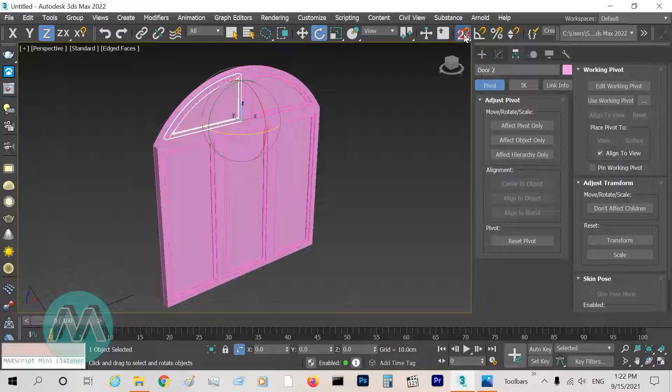In this case, we want to model an arc window. Okay, we have a picture here and we have some parts. In this part we have an arc shape, height 50 centimeters, and its width equals 180 centimeters. And the second part, we have a rectangular shape here and three parts here, with height 150 centimeters and width 180 centimeters.

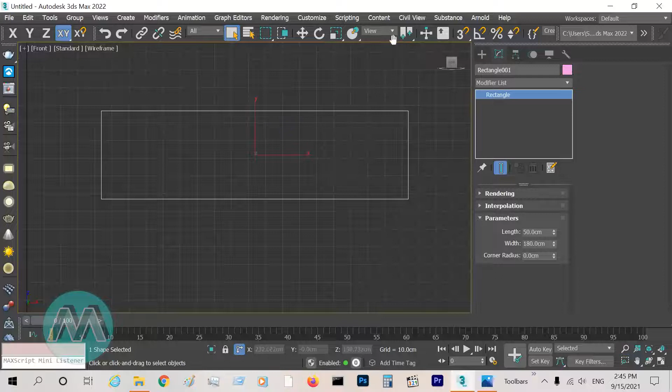Okay, go to 3D Studio Max and front view, draw a rectangle, and set its dimensions: length 180, sorry, 50, and width 180. Okay, I choose snap and set it to vertex and midpoint.

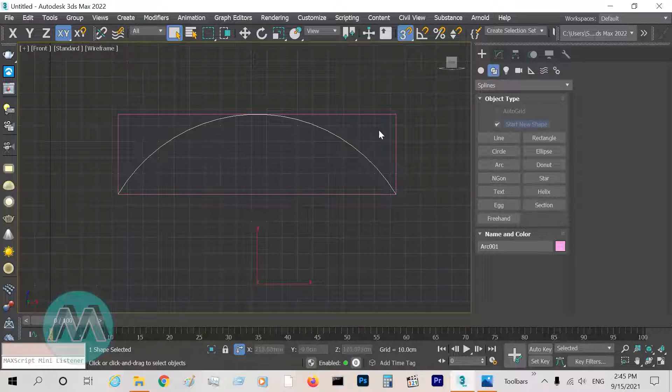Okay, drawing an arc here and here and here. Okay, using this rectangular shape we can draw an arc here. We don't need the rectangular shape, I select it and delete. Select the arc shape, convert it to editable spline, and connect its vertices together. Like this. Okay.

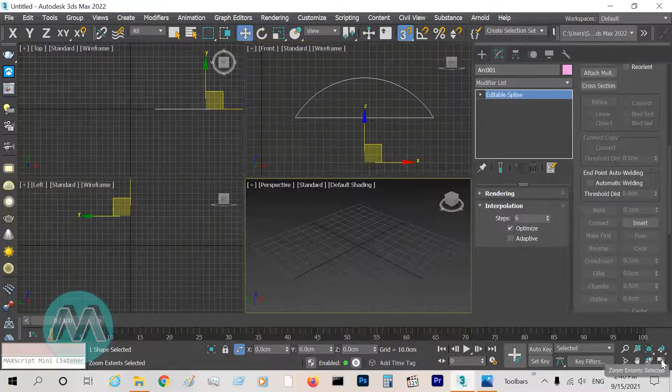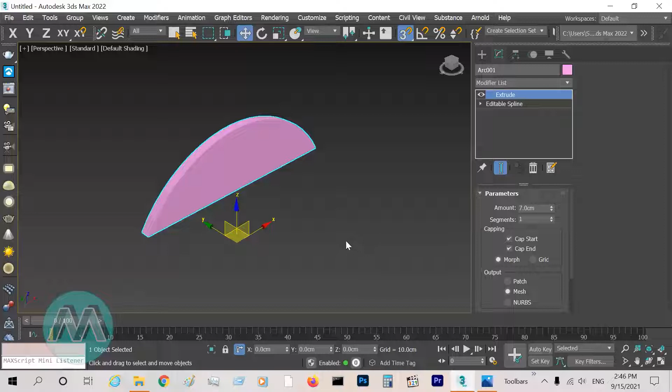We can draw this arc shape in 3D Studio Max, and our thickness is 7 centimeters. For this one, I extrude this shape equal to 7 centimeters and turn off the selection brackets. Press F4 to see the lines of this object and its segments, and I want to increase the steps here for more details in the top of the object.

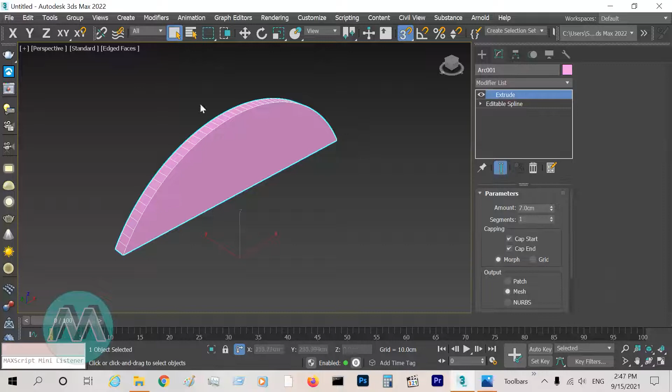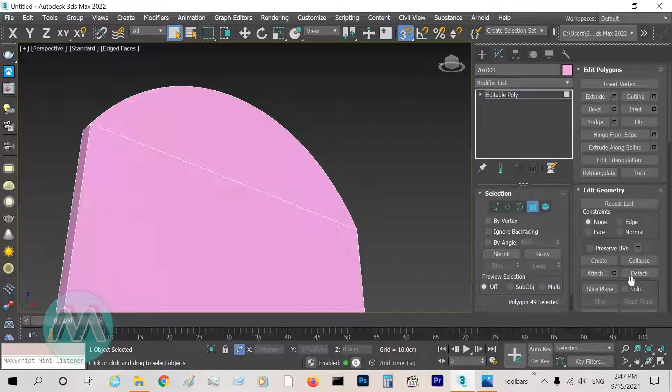Okay, I convert it to editable poly. Select the polygon sub-object mode. Select this polygon and extrude it 150 centimeters for modeling the second part of the window, the rectangular shape of the window. Here we have 150 centimeters. Okay.

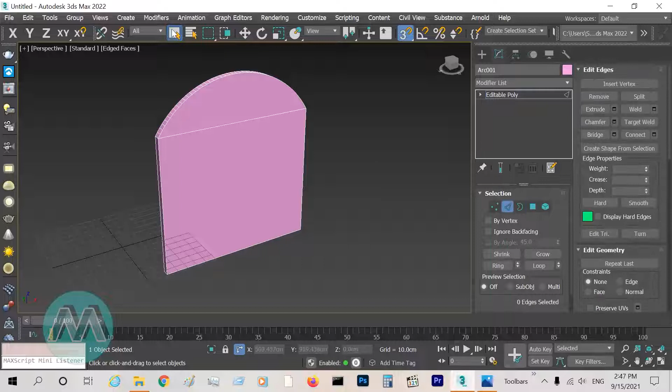For these three parts I go to edge mode, select all edges here. I press F3 to see it in wireframe mode. Select these lines and connect them to each other. We set the segments to 2 and okay. Okay, we have this shape.

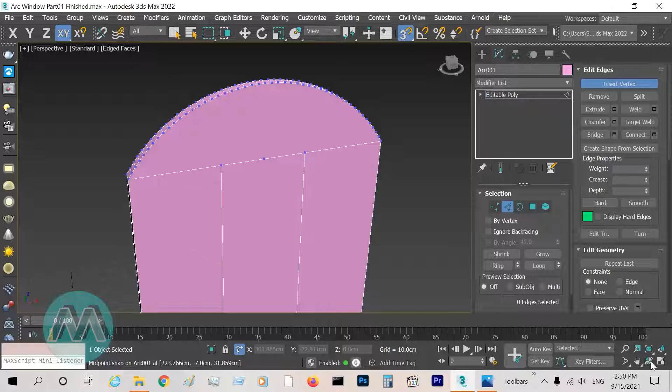I go to the perspective viewport, go to polygon mode, and I want to split this peak into two parts. For this reason, I set the snaps to vertex and midpoint, go to edge mode, and insert vertex here, one, and here. By using the snap, we can put the new vertex in the middle of these lines, here and here. Okay, I go to vertex mode, select this vertex here and this vertex, and connect them with the connect button.

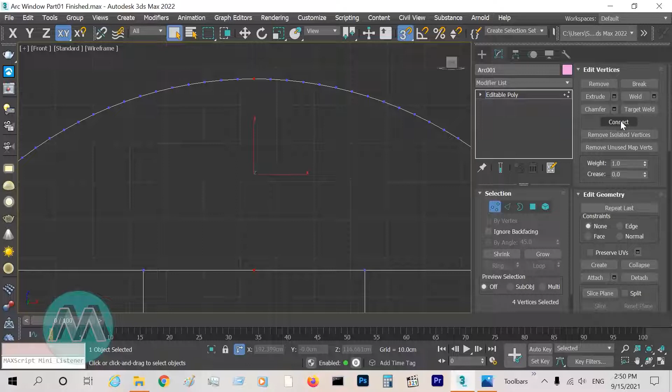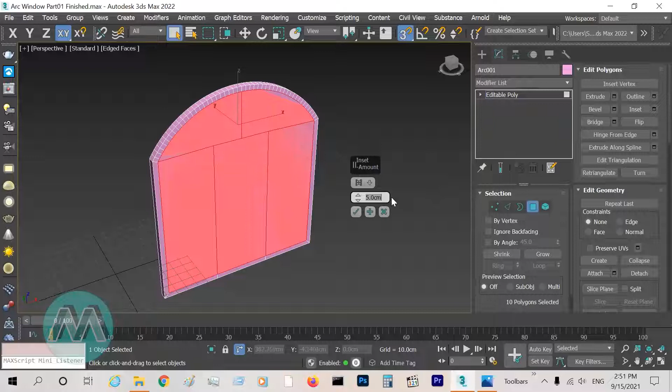Okay, I go to polygon mode, select all the polygons in front of the window and in the back of the window, so we have 10 polygons here. Okay, in the picture we have 5 centimeters in this thickness. For this reason, I go to inset and set the inset to 5 centimeters, and set this option to by polygon, because we want to split the polygons here.

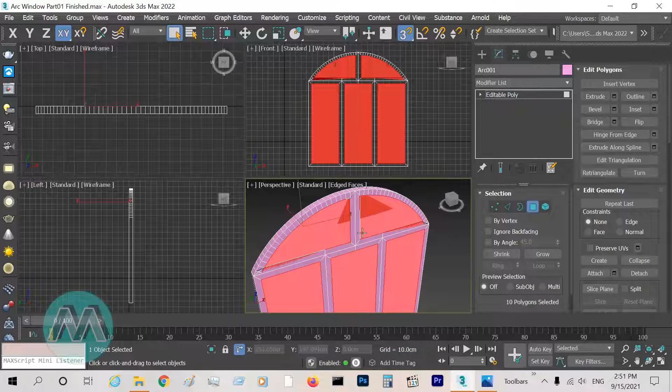Okay, we have some problems. You see we have a dark area here and here, and it's because of vertices crossing into other areas. To solve it, I go to the front viewport, and I want to move this vertex. Okay, turn off the snap, and I move this vertex here and here.

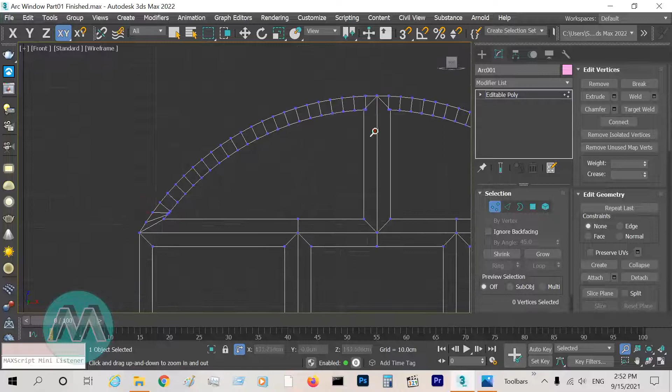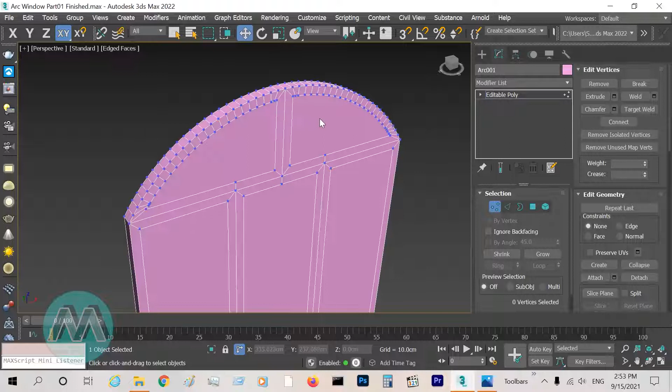Notice that we move the vertex in a way that we save this curvature shape. Okay, I go here and fix it. Also here, and here. I first move this vertex and this and this. Okay, we have a nice result. If I go to the perspective window, we can see we solved this problem.

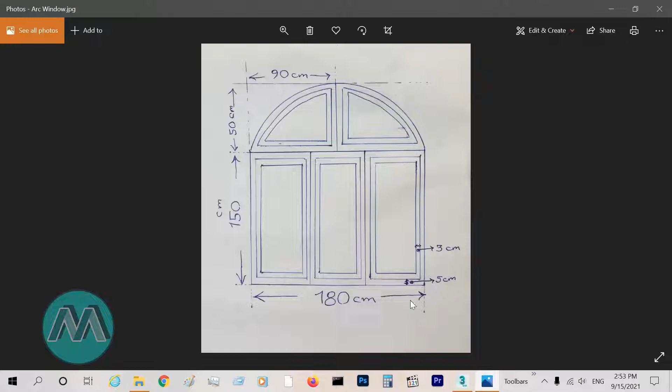Okay, I select the polygons that are automatically selected and extrude them about 1.5, negative 1.5, and we have 3 centimeters here for the second part of the window. For this design, I select the polygons and inset them about 3 centimeters. We have the same problem here, and I want to solve it.

Go to vertex mode and move this vertex to solve this problem, like it. Okay, I go here and here.

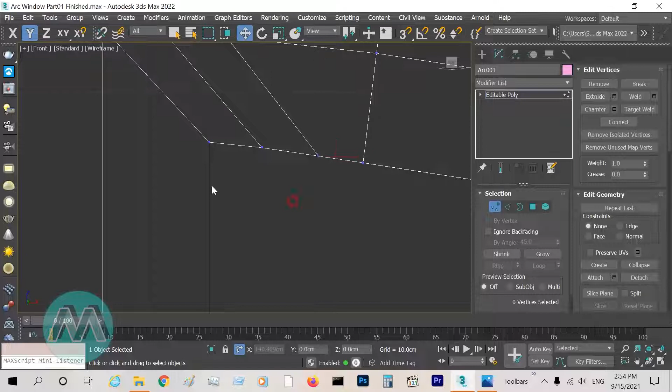Okay, again here, and here. I move this and move these vertices here. This is too close, so I move them to solve this problem.

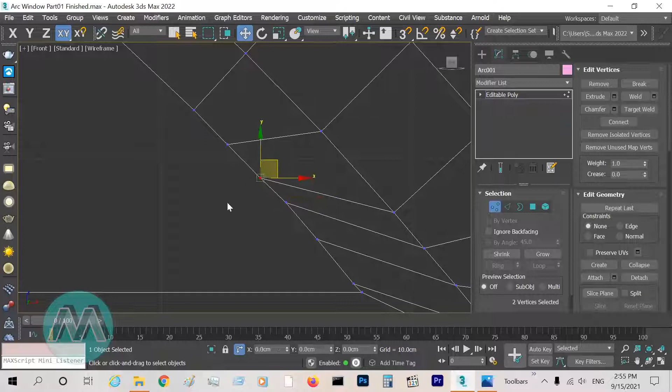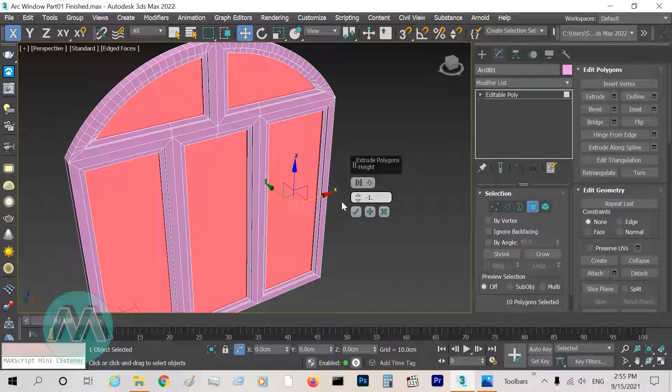Okay, we have a nice result, and I select the polygons in the polygon mode and extrude it again. In this case, negative 1.75, because we have 5 millimeter for the glasses thickness in here. Okay.

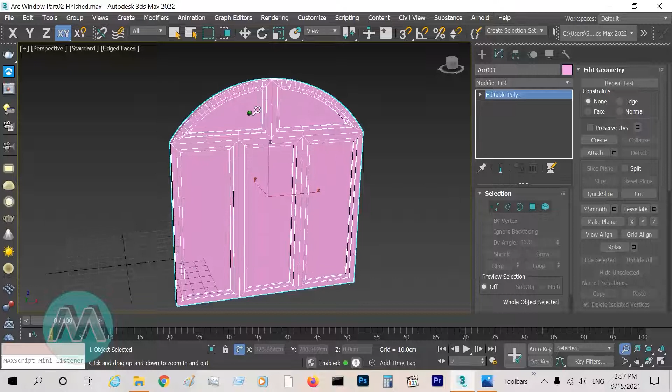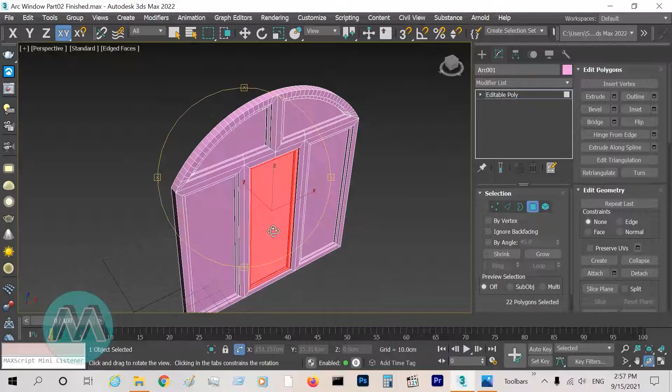Okay, in this case we want to open some parts of window. For this reason, I go to front window, go to polygon mode and select these parts of this window. Here, and you can see we select them in two sides. Go to edit geometry mode and detach and set this name to door 1.

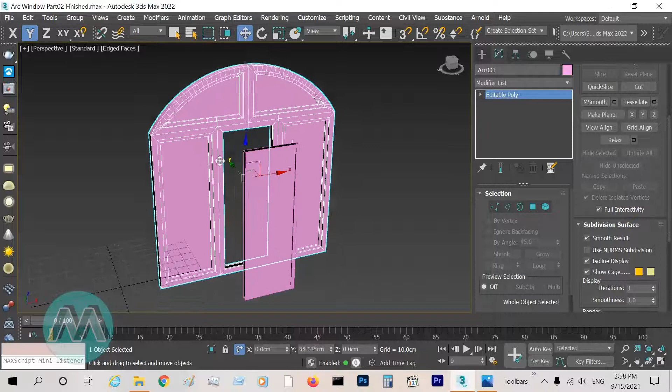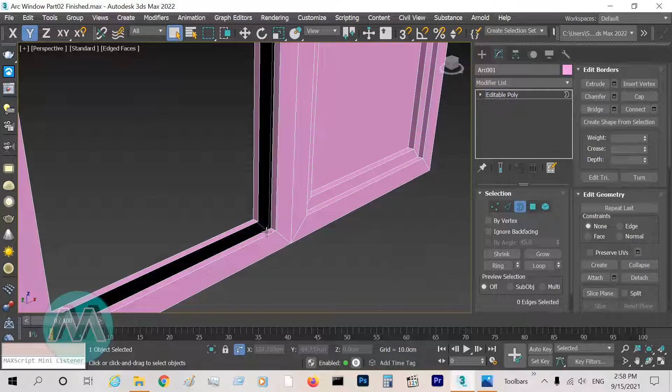Okay, if I exit the polygon mode and move this window, you can see we have these two parts. Okay, I select this part and hide it. We have some problem here. We have the open polygons here, or the hole here. For this reason, I go to border mode, select these borders, and with the bridge button we can bridge them and create new polygons here, and we can close it.

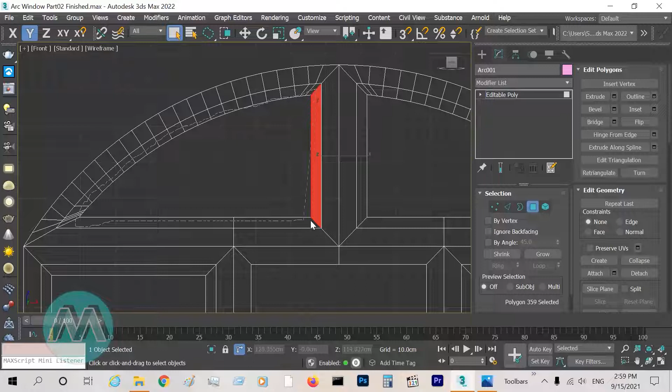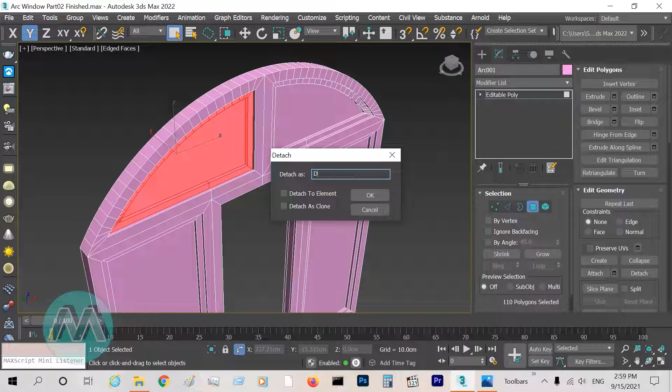Okay, I go to front window and select this part of window with the fence selection mode, that we want to select all part of this window. Okay, sorry, I want to go to polygon mode and try again. Okay, hold the control key and select this area. We select this part here and here. Okay, go to geometry and detach and set its name to door 2.

Okay, I select it and hide it. You see, we also have this problem here. Go to border mode, select these borders and bridge them.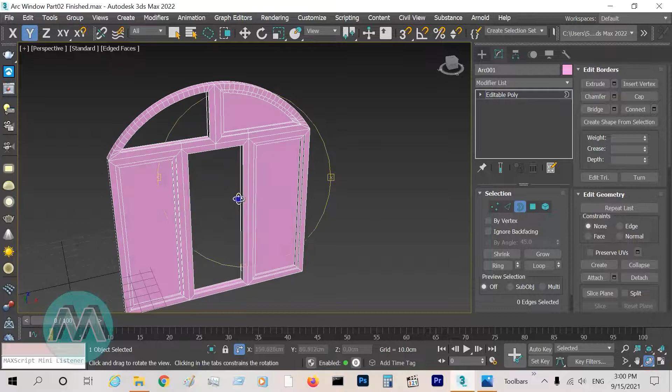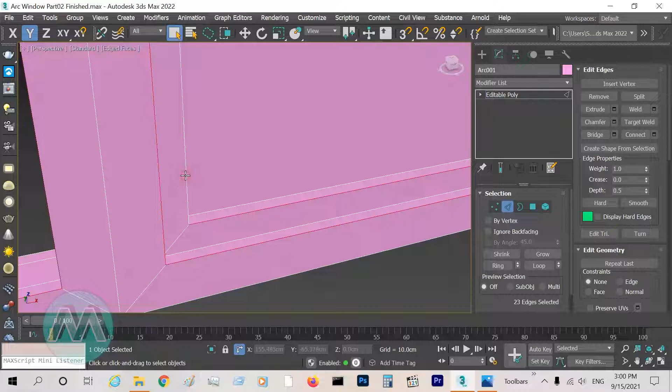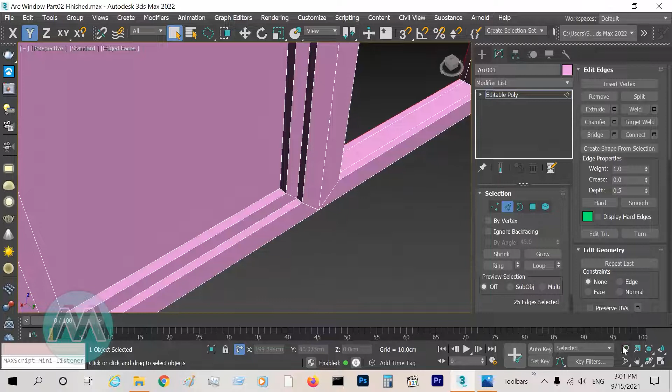Okay, I want to apply some detail to this window. Go to edge mode and select this edge here, here, here, and these parts. You must be careful in selecting the edges that we want, select them correctly. Okay, we have this line selected that it's not good. With Alt key I click it and deselect it. Okay, hold Control key and select these lines again,

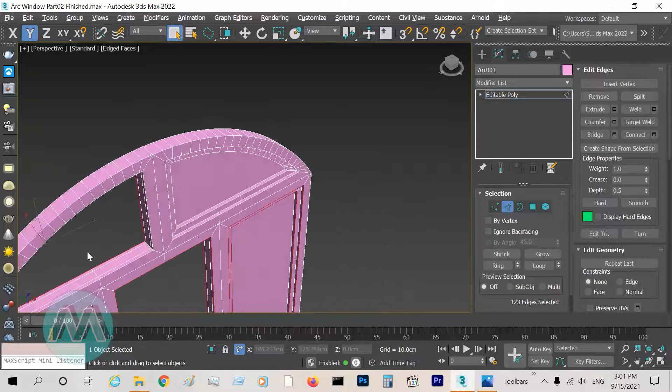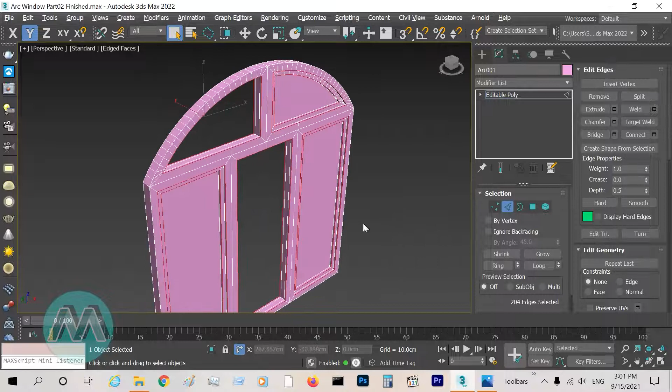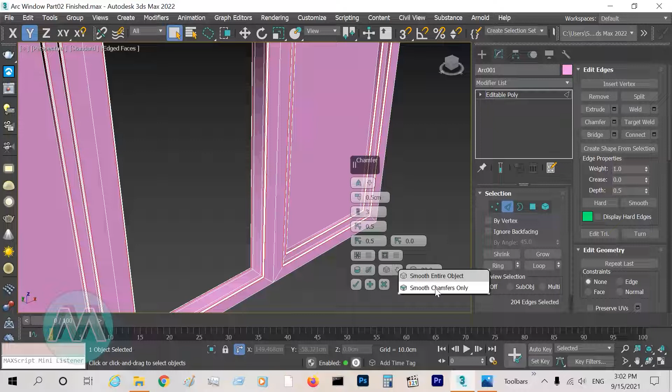here and here, and in the top of the window, here, here, this one, and this here and here. Okay, check the lines for the selection correctly. So we have selected them correctly. Okay, set the chamfer about 0.5 centimeter or 5 millimeters. Set the segments to 3 and set the smooth to smooth chamfer only for best result.

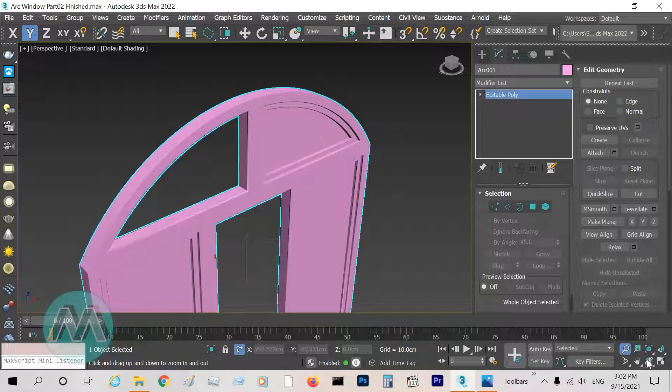Okay, I turn off the edge mode, turn off the edged face mode, and we can see some detail here and here. That is good for our window. We have some problem here that we solve in the next step. That's because of the smoothing of these polygons.

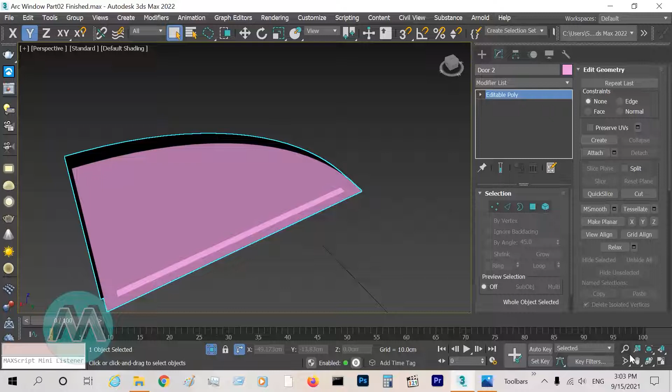Okay, I unhide the parts of window, unhide all, select this part and apply these details to this window also. Okay, I go to border mode, select these borders and bridge them, go to edge mode, select these edges and these edges here and chamfer them equals 5 millimeters and set this setting.

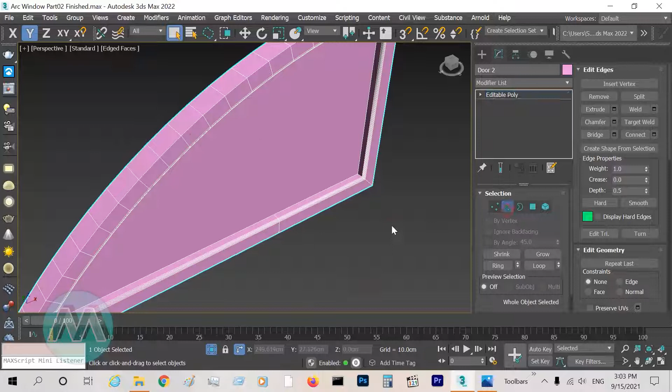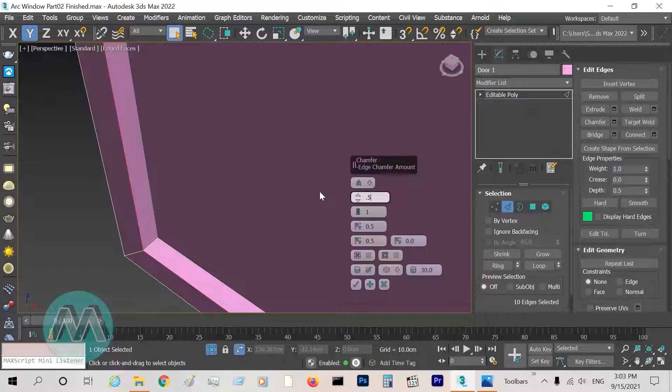Again, for this part I go to border mode, bridge them, go to edge mode, select this and select this and chamfer them 5 millimeter and these options here. Okay, we finished the modeling of an arc window.

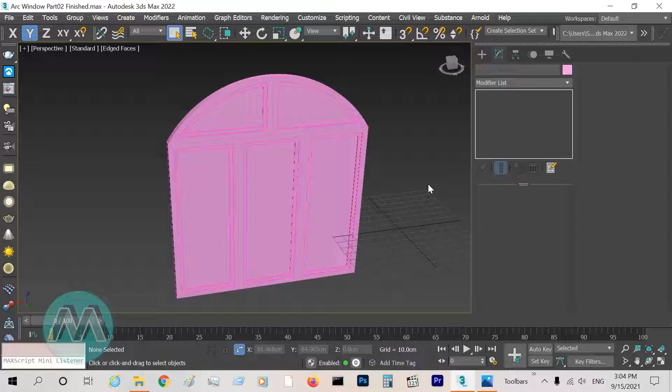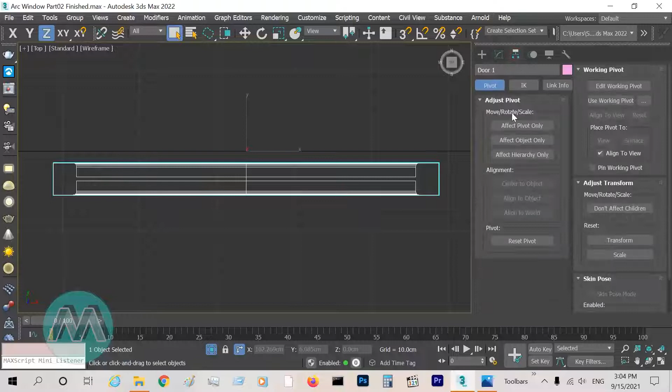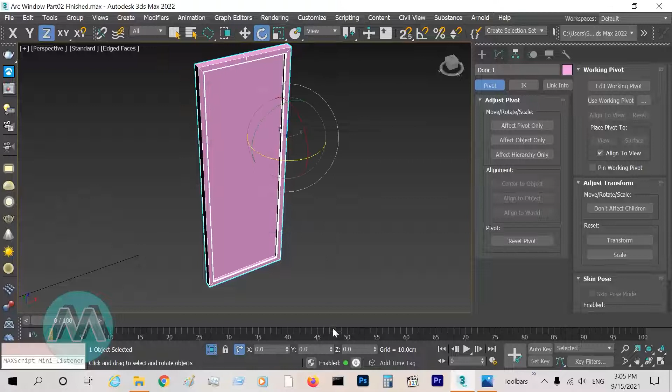In the last part we want to open these windows. Okay, I select it and rotate it, and it rotates from the middle of it, that's wrong. For this problem, go to top viewport, go to hierarchy, select affect pivot only and set the pivot to here, to this point. Okay, I turn off the affect pivot only. If I select and rotate the window, we can see it rotates correctly.

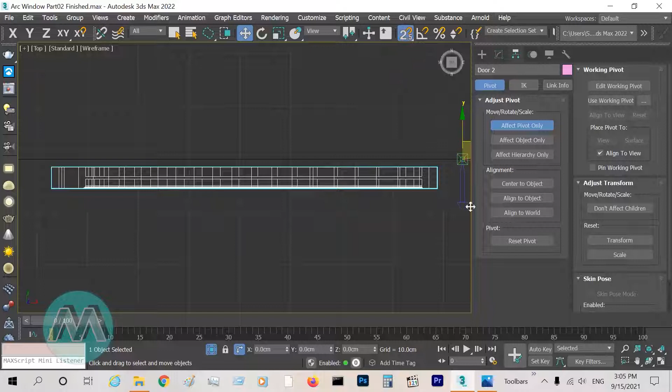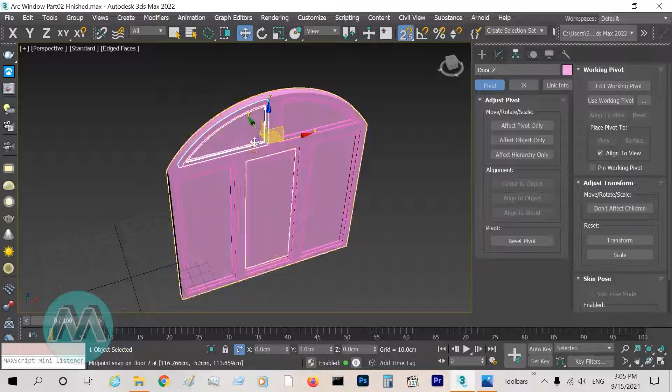Do this again for this part, go to top viewport, select affect pivot only, activate the snap and set it. In the front viewport, again set it at this point of window. Okay, I turn off the affect pivot only, exit isolate mode, and if I rotate this part of window, we can see that it's rotated correctly. You also can set this point of rotation to any point if you want.

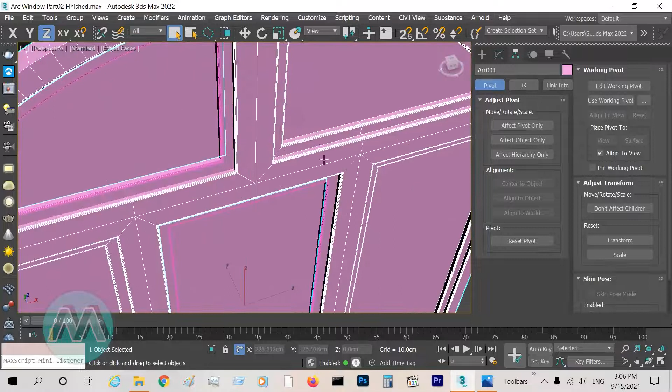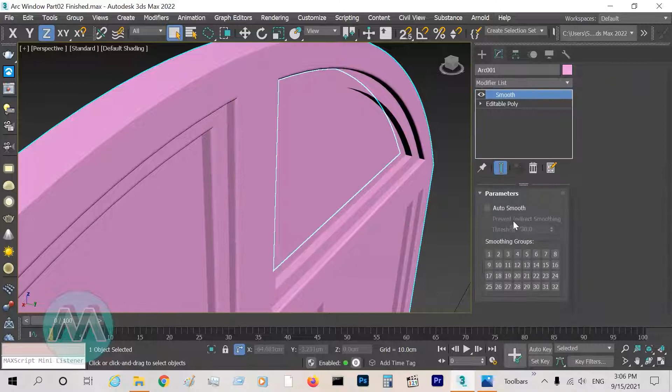Okay, I solve the last problem of smoothing. It's here, the dark areas. I select the window, go to modify panel and select the smooth modifier. Set auto smooth, set prevent indirect smoothing and threshold to 10.

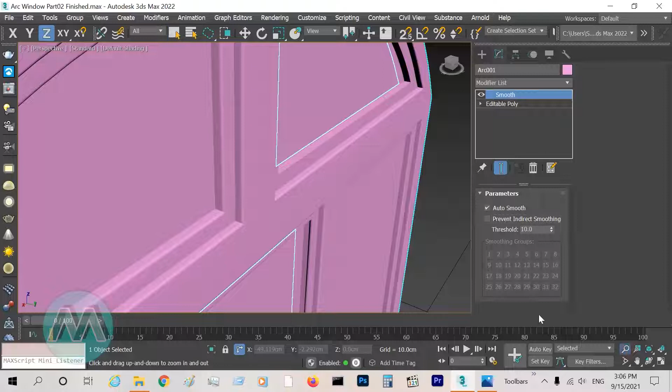Okay, we have some problems here. I turn off the prevent indirect. Okay, we have a good result here. Auto smoothing and threshold 10, in 10 angle.